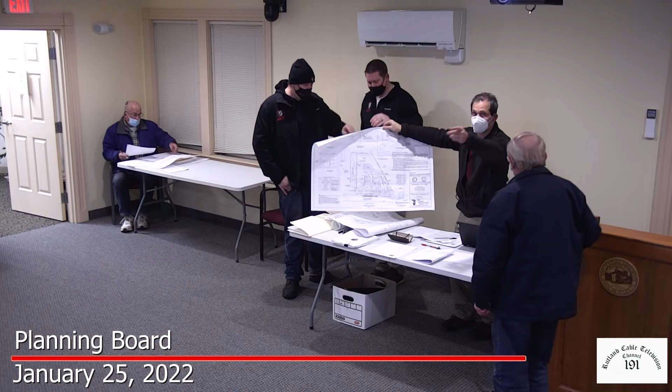Well, where would you like this to be so that everyone can take a look? Can you hold it up and talk to it while you're at it? All right, can you hold this?

So we're looking at Pommogussett Road here. We're looking at this property facing this way right now, which is right next door to us. Our egress and everything has been laid out, and we're looking at a retaining wall here, which is gonna be no bigger than 3 feet.

It's gonna be a modularized block wall, 18 inches high, and we're gonna do 3 feet. If you look at the egress here, we're at 1158 on this end and 1160 coming in over here, so all we need is 2 feet of wall. That keeps us under a permit, which we're gonna have a building permit here anyways to put the building up. So we're talking about 18 inches on top of each other across here, which is 36 inches.

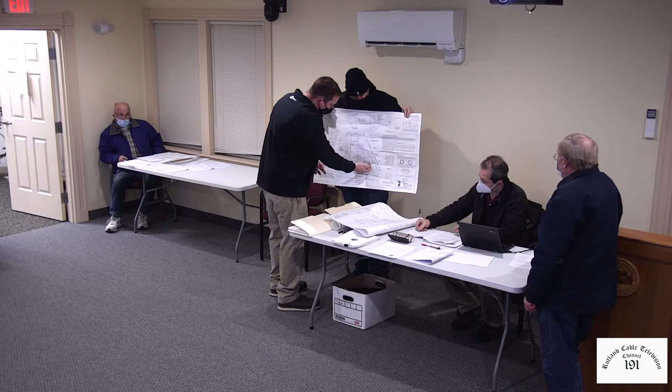And that's all we need to adjust this, so that this can come down and have an egress here. We can tighten up this wall, and then as far as the wall we talked about the other day, the big wall, the structure of this building is going to be that.

The retaining wall, because it's attached to this building. So we're looking at a minimal 4 feet of wall, right at the end of this. Just a small retaining block wall.

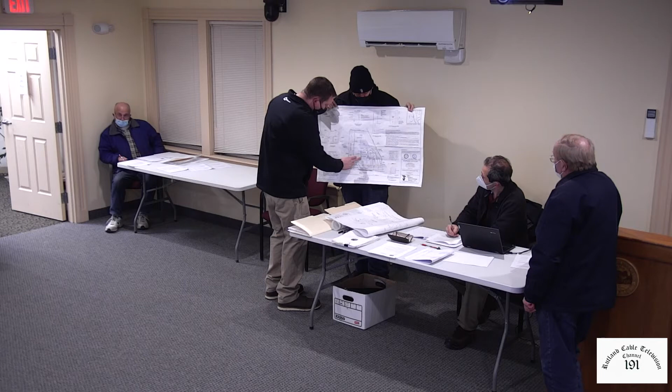Really, all of this wall that we discussed is going to be the foundation of that other building that's attached, so it's going to be included with the building. Which is great, we appreciate that.

By the way, these were questions the board was looking for information on, so I'm sure they'll appreciate it. I understand, and I did everything we could do. Yep, that's great, thank you.

So really, where we're looking, there's not a lot of wall going in there. It's gonna be structure of the building. And on the other side, we're under 4 feet. We're gonna be 36 inches at this point.

So is this for the file as well? Sure, okay, if you need that, that's fine. Do we have another copy of that? No, I'll take that. I'll get a copy made for the file. Yes, okay.

So the next item has to do with the utility connections, the electrical utility connections, which I believe you touched on, and that just had to do with showing that the connection will run underneath the building.

Yes, that's what we're looking at right now, Ron. We have continuous underneath that building, right from the utility pole, and we can go right out. Now that it's connected on a building, we can go right under that. We have a channel there that ductwork runs anyways.

It's a fully accessible channel, we can throw it in PVC or whatever. We had a discussion with the electrical engineer Friday morning, and we're gonna update the electrical. The panel's gonna have to be updated to 400.

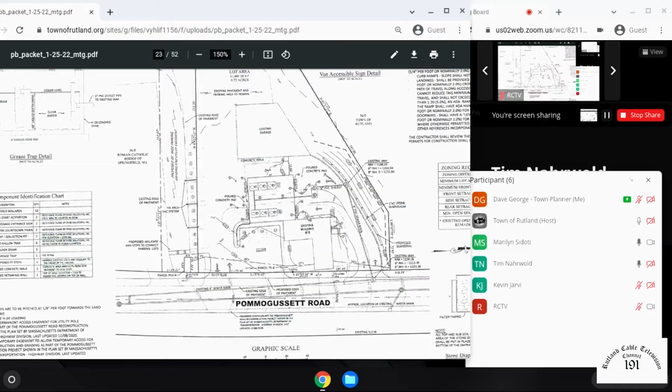Well, you've added a roof, and what I don't like in this document from New England Environmental Design is I see the words 'offer some' and 'should flow.' I'm an engineer and I don't like the words 'should' and 'will offer some.' I like to have actual facts.

That's the reason I ask, if typically—and the board can tell me if I'm wrong—on any commercial building we've always asked for the stormwater calculations to be run and checked by Carl. So is that what we need? We need the stormwater runoff of that 4-pitch roof if we decide to go with a 4-pitch? You want to see how much runoff is coming into the gutters? Or what I've been told is that asphalt is asphalt—it's the same runoff, you have the same square footage of where water is hitting that.

The runoff isn't going to change what we do here if it's the same substrate we're coming down on. I'm not a mechanical engineer, so I'm just putting out what the planning board's procedures have been in the past. Norm, last time I remember, Mark Elbag had a computer program that calculated this, we checked it, sent it to Carl to be checked, and we actually found some errors. So I don't know what that program does. I'm not an engineer either, but I can look at the square footage and say runoff is runoff. Maybe I'm misinformed, but whatever you need — if you want this engineered on a 4-pitch roof to tell you the difference between runoff on an asphalt driveway versus an asphalt roof over the driveway — I'll tell you it's the same thing.

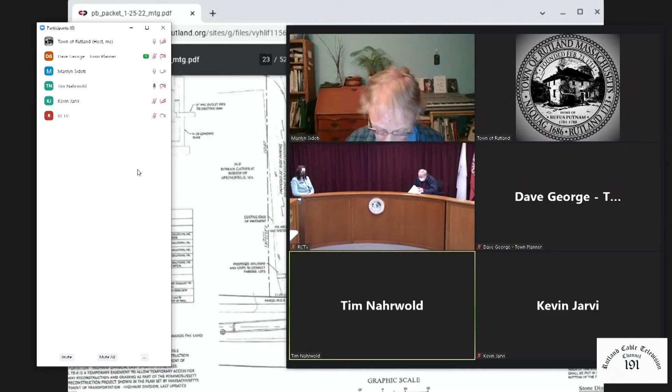1B. Because he calls out in this release of covenant 1B, 3A, 4 Rev, 5 Rev. But on these 2015 plans I'm looking at, there's a 3 Rev, and I can't find 1B—well, I can find 1B, but it's down on Pommogussett. It's not even attached to Arrowhead Way.

So I'm looking at this drawing from 3/11/15, and the first section of it isn't matching up with what I have in my hand. Does anybody else see that, or am I just blind? And he doesn't even call out 2 Rev for Arrowhead Way as part of the release of covenant. So the lots called out in the subdivision control agreement release don't match. Somebody help me understand that I'm wrong.

The only thing I'm looking at here is 2 Rev on Arrowhead Way. Yeah, Normie, I believe that's one of the existing houses. Yeah. But hasn't that been reconfigured? Isn't that the whole lawsuit thing we didn't want to get into, because they reconfigured the lot? So it's like a brand new lot? I'm thinking probably yes, but—

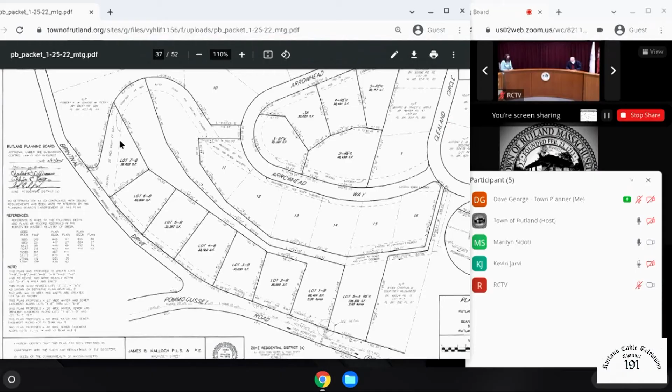He is using the frontage on Pommogussett, but the houses which are now already built, you see where that old driveway went up to the top of Bear Hill, that big curved thing, kind of like a curved loop, over here, that was the driveway. Yes, that's where those houses are built. They are now existing, in that area. Not on Pommogussett, right, they're not on Pommogussett.

They're built like where Dave's arrow is right now. There's a house right there. There's a house right there. But he couldn't get frontage because that was not going to be a road, so he created that long handle to come down to Pommogussett.

Interesting. Okay, no, I mean, it's what it is. Man, oh man, I'm surprised he didn't find a different way of doing it, because if you take a look at the acreage on those things, they're 2.5 or 2 3/4 acre lots, whereas the others are only 30,000 square foot lots.

That's really interesting, you could have a little dirt bike path all behind there. I'm just saying, wow, you could really tear up behind your neighbors if you wanted to, you know?

But hey, okay, so it's all up, it's all done, it is what it is. Again, Tim's not back, but I'm new to this too, so I think he brought up a very good point. Why is that one brought on the covenant of Arrowhead when it's already been built? Because the driveway comes off of Arrowhead, is that safe to say? They have a shared driveway to those two houses, right, off of Arrowhead Way. So maybe that's why the covenant's on.

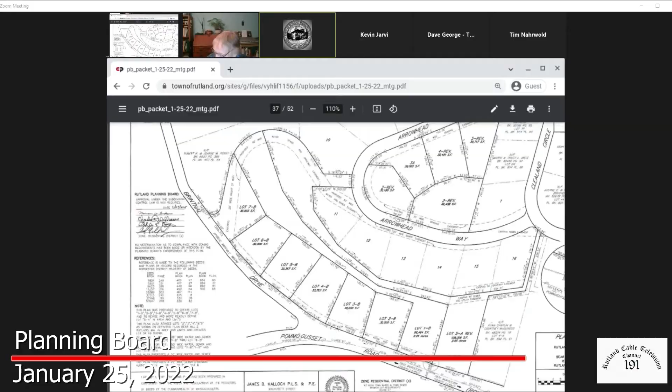Okay, all right, I'm fine, because you said Dave will write that on there, so at least there'll be some reference to what subdivision it is being referenced to. Yeah, the thing is, there is a reference. There's a deed and book and lot numbers and all that stuff. There is a reference, it's just that it doesn't stand out. It would be nice to have it, just like the subdivision control agreement - it says subdivision control agreement, Bear Hill 2 subdivision, release of covenant. We'd like to say, Town of Rutland, Bear Hill 2 subdivision. But to turn it down right now, there is legal reference to connect the two.

I'm good, okay. Where's the money? Isn't there usually, I mean, this is a release of covenant, doesn't it show how much is gonna be left? Hey, Dick, where's my second egress?

What do you mean, how much money is left? Yeah, that's a fight I don't wanna take up right now. Don't we usually get a sheet that shows the money, what's left to do and everything else when we're releasing part of the covenant? No. You're talking about a bond reduction. You're right, bond reduction, not covenant.

We have Quinn's report showing that the remaining bond is $140,237.25. That's what generated this. Well, that's what I don't have here. Yeah, we got that quite a while back. The report was previously distributed some time ago when it was originally prepared. I'm gonna say that's from back 2 months ago. I think so. I say we hold off for another month till he gets it completed.

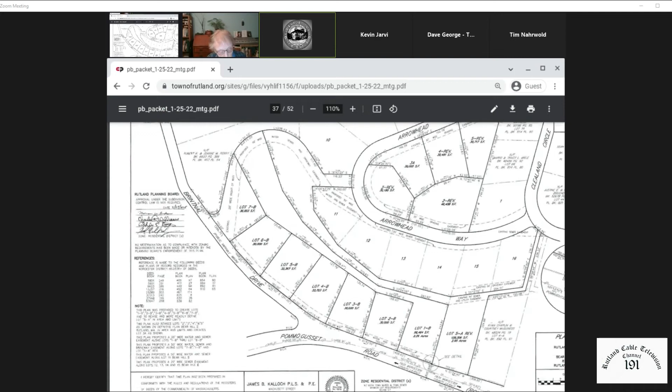Okay, do I hear a second? And that will include Dave writing in Bear Hill 2. I'll second. Is there any further discussion?

Hearing none, once again roll call. All in favor? Kevin? Aye. Marilyn? Aye. Tim? Aye. Dick? Aye. Norm? Aye.

So anyway, Dick, if you can sign tonight. I can get up tomorrow or Thursday and go into Anita and sign in her presence. Then we just need one more. Yeah, I want to be up tomorrow in the morning anyways for the Irish. Okay, that'll be good.

We're moving along like a herd of turtles. So there's 2 pages to be signed. Yes. Okay, that was Bear Hill 2.

Number 8, there's an informational thing, an upcoming item. So first off, just to caveat, this is information for the board that there is a special permit that'll be coming up for a hearing at the end of February for a marijuana retail facility at 79 Main Street. I will say that the board will be receiving detailed information in time on this matter. Tonight is just to introduce the project. Staff has not had a lot of time to review this thing in detail, so I know there may be lots of questions, but some of those might be premature. Suffice it to say that this plan shows the building location, the building size, the parking lots, and the site circulation and access. Outside of that, we haven't looked at the particular details. That information will be coming to the board at this point.

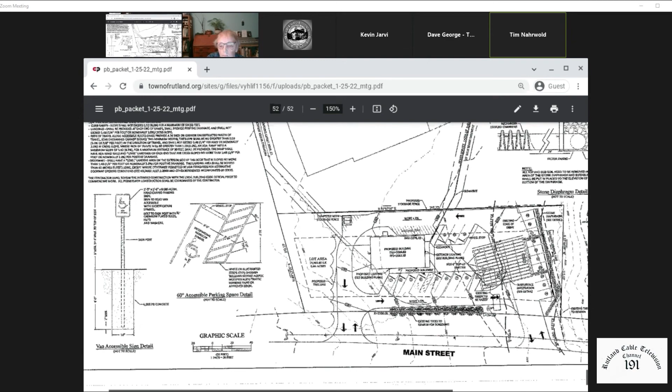I'm not sure, I have the plan up. Can you show us where these culverts are? Yeah, it's up in the upper right-hand corner. Am I blind? Like I said, we have it. I'm looking at it, it's right under where it says general notes. It says...

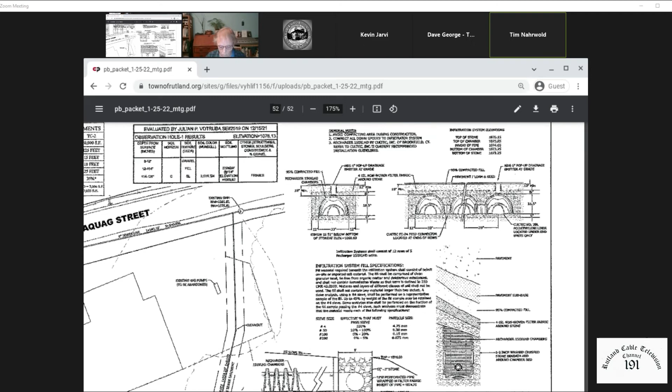95% compacted fill, it says Cultec FC-24 feed connector located at ends of rows, polyethylene liner located under end of units. Unless I don't know my stuff, is that an infiltrator or is that a culvert, or maybe I don't know what I'm looking at? That's a possibility too.

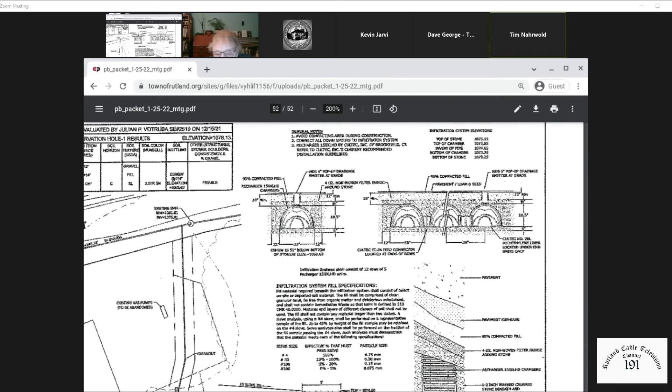That's the infiltrator, that's to take the runoff from the hot top, the pavement, and process it. Yeah, that's the infiltrator. Okay, then I apologize, I was wrong. So this is... and not a culvert? Premature. So therefore there's no question to ask of DOT on this, okay.

Yeah, then I apologize, there's no detail for how they're crossing over that gully that goes off of 122A right in front of that property. So we'll wait, we can wait, I'm fine with that. We'll wait till we get to some discussion about this and move forward. Sorry about that, I apologize. I don't know, I'm not sure it is. I don't know.

Okay. Anything else on the marijuana facility? Like I say, you know, there's gonna be lots of questions, but we've got to at least get a presentation from the applicant first. Correct.

And then maybe after the presentation, I'd suggest a site walk. Maybe that's part of the typical process. I would say yes.

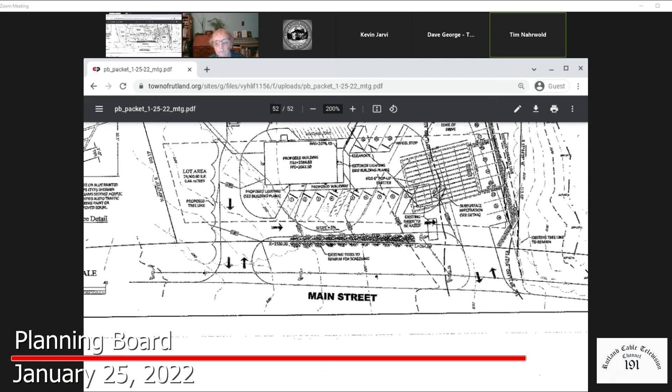Can we, Norm, and maybe I'm being premature, but during that presentation, could we ask for the ConCom and the DPW director to be at that presentation? So as a team we could all ask questions instead of individually? I'm throwing it out there. If the body doesn't agree with that, I'm fine. I'm just throwing it out as an idea.

ConCom may not be involved because I think the wetlands are much further away. Yeah, that was my thought as far as ConCom is concerned. As far as... okay, Joe Buckley...

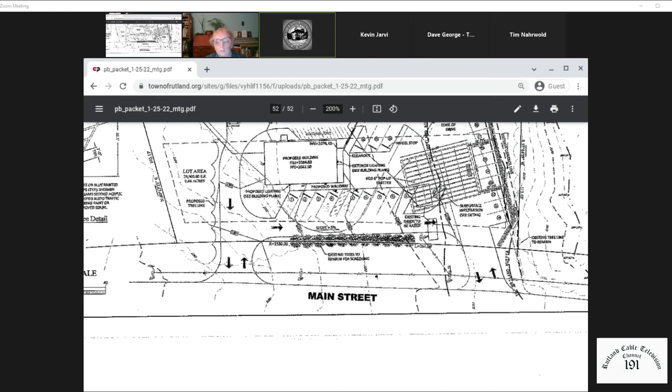I don't know, we could ask him to see if he's interested. Yeah, that's all, if he thinks he can review this on his own and doesn't need to be at the presentation, I'm fine with that too. Yeah, I would like to have his runner-up, Chris. He's just a professional engineer. I know he is, but let's take some of the heat off Joe, let him do his job, and have Chris, who is an assistant, start taking over some of the stuff.

Okay, good enough, thank you. Okay, we'll ask. Okay. Anything else on item 8? Then, business meeting.

And we're already getting kind of late here, but I'm gonna make a suggestion, as at least a beginning of this thing, that we inquire of Quinn Engineering whether they are interested in conducting a thorough review of our subdivision regulations, with an eye towards not just updating, but looking at newer best practices. Well, you better believe it. I like that, Norm, I think that's a great idea. I agree.